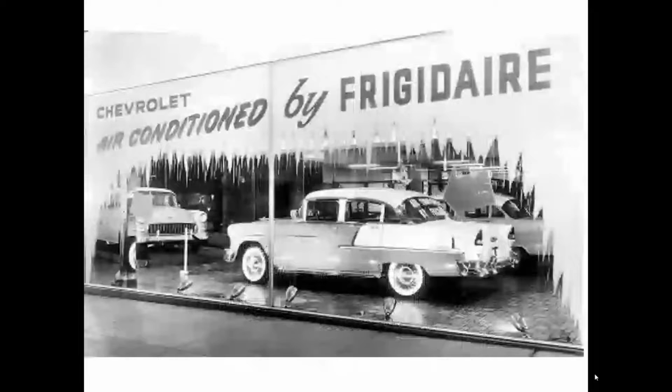In the beginning of automotive air conditioning systems, that would put us in the mid 50s. This is where average vehicles started to use air conditioning.

All vehicles used the same kind of refrigeration oil. It was called refrigeration oil, sometimes also called mineral oil. Same thing: mineral oil, refrigeration oil.

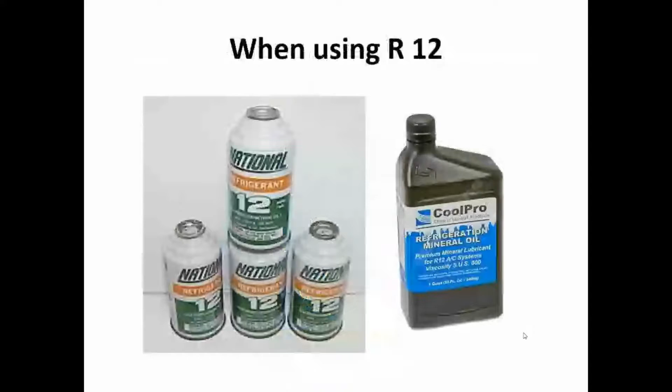When should you use this kind of oil? When you're using R12. When should you use R12? Probably never, it's not very cost effective. They cost about $50 a can, and you have to have a license to get it. It's not practical to use R12.

So what are you supposed to do on some of the classics? You're going to get a lesson on how to convert a little bit later in today's lesson.

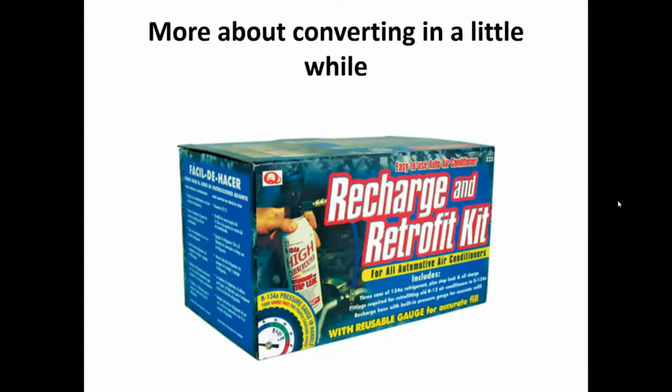For the longest time, all motor companies used the same kind of refrigeration oil. Remember, the refrigeration oil is very special, whether it's the past oil, the present oil, or even the future oil. It's not just regular oil like engine oil, it is highly refined with emphasis on very low moisture content.

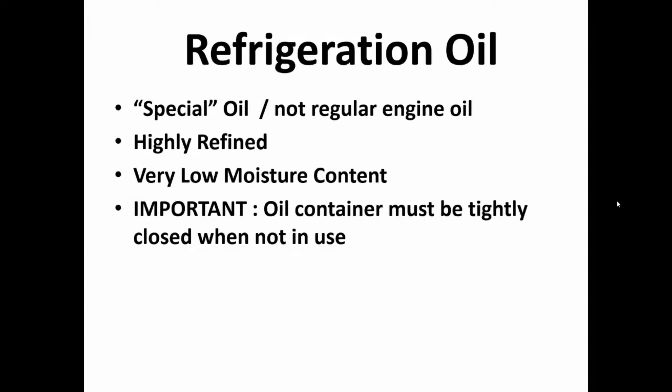Any refrigeration system cannot tolerate moisture. Between deteriorating the system and affecting the performance, refrigeration systems have to be moisture free. In fact, it's important that when you're working with the container of oil, the cap must be installed to prevent moisture from being absorbed into the oil.

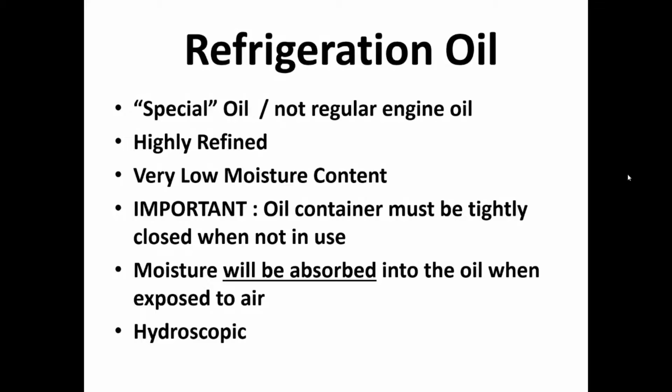Moisture will be absorbed into the oil when exposed to air. The technical term is called hygroscopic. I believe brake fluid is also hygroscopic. It's not good to have oil contaminated with moisture, so we actually go out of our way to keep the moisture out.

The moving parts of the compressor assembly must be lubricated for smooth operation and prevention of damage. It's obvious, just like an engine. But oil is also used at the seals and gaskets as part of the sealing process, and it's intentionally directed to the thermostatic expansion valve for correct operation.

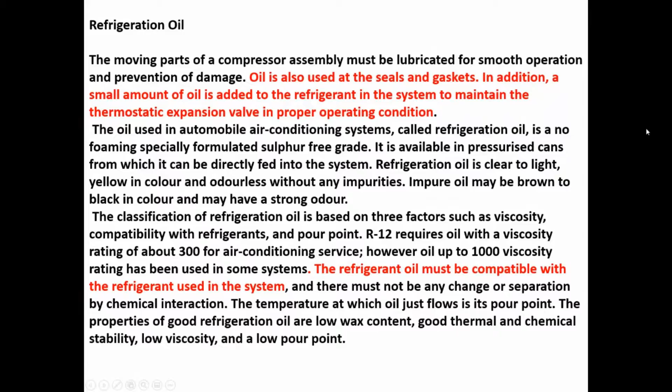The oil must be compatible with the vehicle and the system being used. Now we're in the 90s. Okay, I know that's a little bit old, but I'm headed somewhere with this.

There was one motor company that started to use a different kind of oil. Remember, this is the first time we changed refrigerants, in the early 90s. This is when R12 was on the way out and the present refrigerant was on the way in.

Google it, Google Ford Black Death, and you will find it. I didn't name it, I just share the information. You can read and see how bad it was. I don't need to read it, I was there, I saw it, I smelled it, hell, I tasted it.

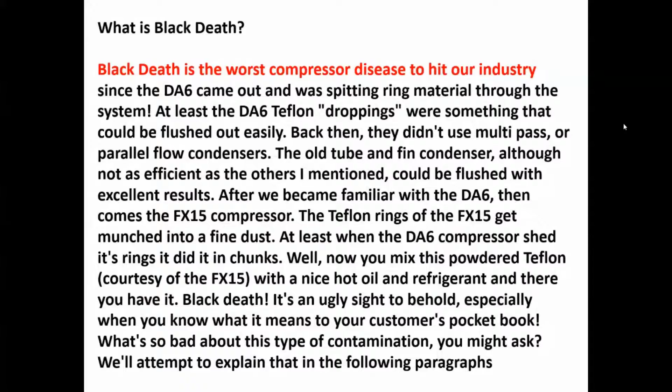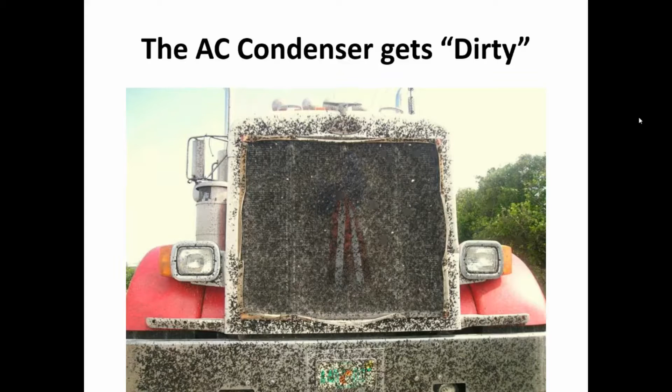It's the worst compressor disease to hit the industry. Here's what would happen: let's just say this is about a '92, and the vehicle starts off new. After a few years, obviously the vehicle gets a little older, and since nobody ever cleans their condenser, look at that mess. Since nobody ever cleans their condenser, the condensers are dirty.

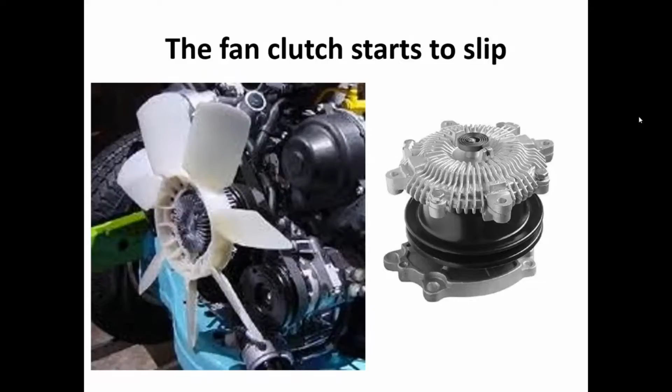And now we're starting to overheat the refrigerant. We're starting to overheat the compressor. I'm headed somewhere. These guys don't last forever. All the pickups, they had fan clutches. And after a few years and about 100,000 miles, these guys are going to slip. Some of the smaller vehicles on the Fords had the electric cooling fans, and it's very important that we keep the condenser as not hot as possible.

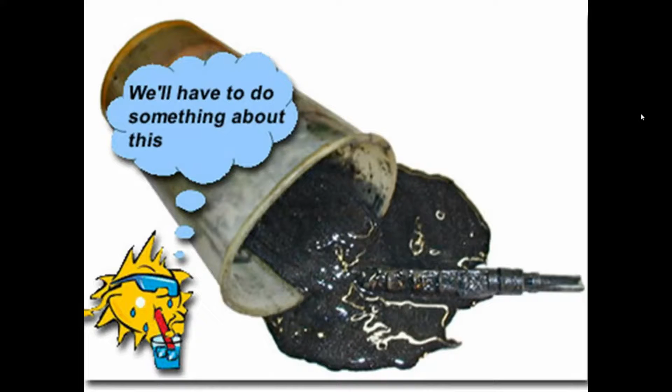You're in stop and go driving. You're in South Texas. It's hot as heck. Poor cars. Anyway, here's what would happen. The Black Death. It came from overheating. What caused it? What caused Black Death? In the red. It's the Teflon rings and the pistons.

You know, if I say compressor piston rings, you know exactly what I'm talking about. I'm talking about the piston rings. Apparently, the Teflon, the material they were using, was not meant for South Texas. They would get munched into a fine dust, and they would hit the hot oil because everything is so hot. The condenser is dirty, the clutch is slipping, extreme severe heat, stop and go driving. It's hot. The compressor would scream, it could cough.

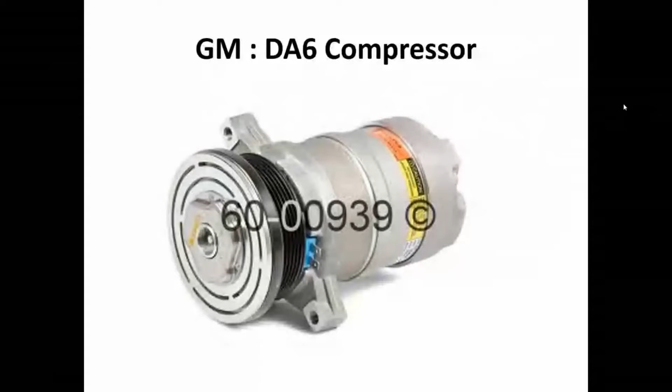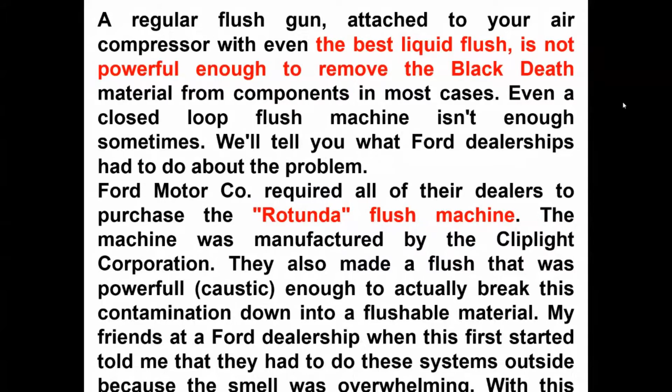Now, I'm not sure what it's like in Colorado. I've never fixed a car over there, but I know in extreme severe heat, these Mickey Mouse Teflon piston rings don't hold up very well in extreme conditions, and stop and go driving and dirty condensers and slipping fan clutches and inoperative cooling fans. You're destroying the piston rings. There's the FX15. And the best liquid flush was not powerful enough.

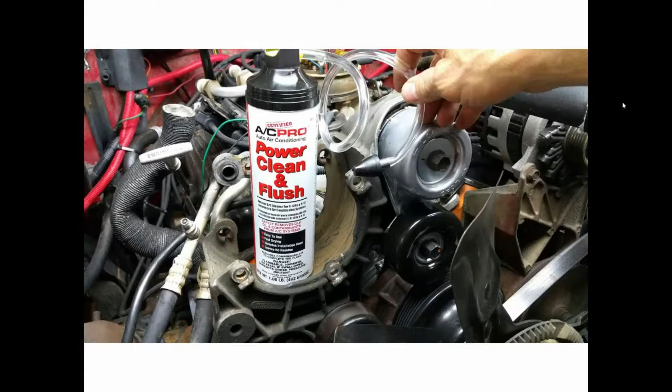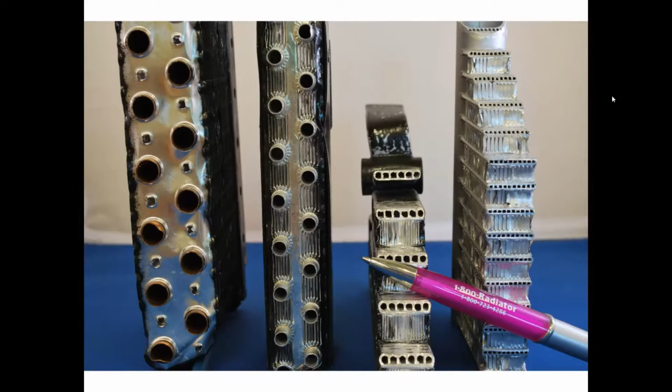On the left, that's a cutaway of a condenser. And that's what it used to look like. Look at the size of the passages back in the 90s and earlier. On the right, this is the design of a typical late model, meaning the latest thing out, new condenser. The passages are tiny, and you need to be asking yourself, well, why do they do that? They designed this condenser with multi-cross flow passages for extreme efficiency in the capacity. What the heck does that mean?

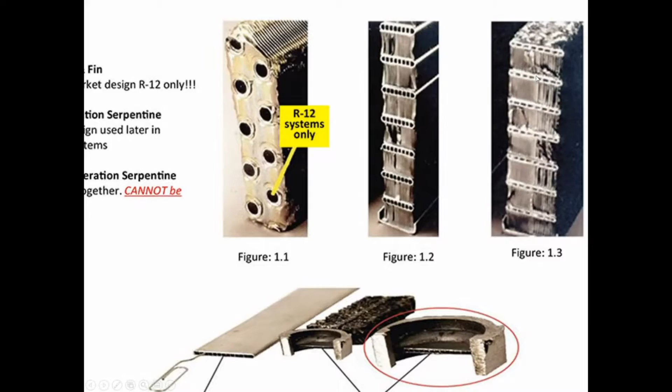In the early model on the left, we needed 4 cans of Freon to fill up that average pickup or average size car. On the right, a full size pickup, sometimes 2 cans is too much or 2 cans is plenty. We are now with high efficiency condensers. But what happens is we cannot flush them anymore. We used to flush, where's my picture of the flush? We still flush some of the components, but one of the components that we don't flush anymore is the condenser because of its design.

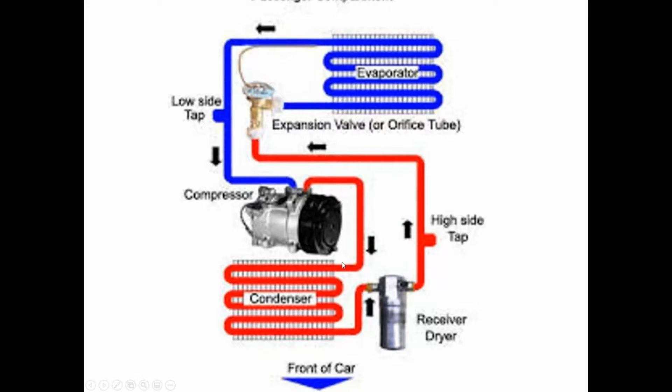They are justified in recommending or requiring that you replace the condenser if an AC compressor has had a catastrophic internal failure or even a mediocre failure. You just have to understand, at the compressor, at the red, the first place the guts of the compressor are headed is the condenser. The condenser is going to trap most of the deposits from the compressor. We used to flush them, but today you have to understand that we have to replace them. We're going to have to do something about this.

So how did we fix Black Death? Well, the answer was to add some extra oil. That's what the experts say. Let's put some extra oil in it. It seemed to work. Add extra oil above system capacity. Well, how much?

1 or 2 extra ounces above system capacity. This was my first introduction to extra oil. I like oil. In fact, I am very generous with the oil. I don't know if you've picked up on it, but there's three major reasons I like extra oil. There they are, refrigeration oil. Now we might as well get all the other reasons that I like extra oil.

I've done it by the book. I put in exactly what it called for. Yeah, I did everything correctly. I would flush, I would put a dryer, I would put the correct amount of oil, I would do my nitrogen evacuation. All of this is coming at you in the lab. I would do this at home, trying to make a little extra money on the weekends, and I don't like it when something went wrong.

In fact, I hated it when I had to do the job again for free. Well, why for free? Because I guarantee my work. I would do a compressor job, and within a month, that compressor's back. I absolutely hated it. After 1 or 2, what I call ridiculous numbers of system capacity. Let me show you in the red. This is an example of what I call a ridiculous number.

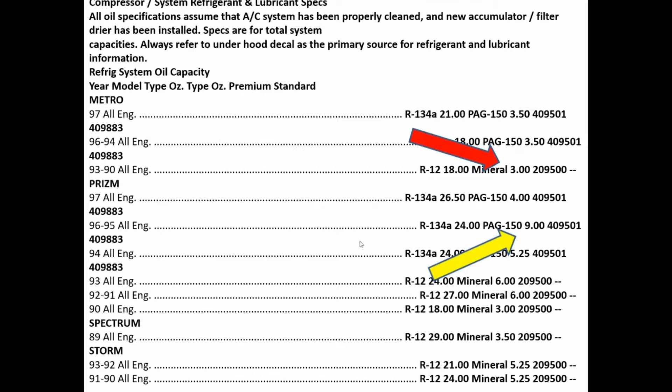Now, in the yellow, that's a more realistic number. Most of the vehicles used to take 6, 8 ounces. Some of the larger units would have to take some more. Some of the really small ones, maybe 6. But that red arrow pointing to 3 ounces, I think that's ridiculous. Screw the specs. I'm not working for free. I'm going to put some extra oil. It worked on Black Death. It's going to work on these ridiculous numbers. And it's pretty good on the regular amounts too.

The last reason I like extra oil, because it's very helpful for the UV dye. In fact, the UV dye is blank, worthless. The UV dye doesn't work by itself. It has to have the oil. The UV dye needs the oil.

Now, here's a quick lesson on converting. But first, let's get EPA out of the way. EPA wanted 3 things. Now, EPA is not interested in satisfying the customer. EPA is interested in saving the world. Not one speck of refrigerant should you vent. That means let it go into the atmosphere. I'm embarrassed to say I did it for decades, but that's all we knew. We didn't know any better.

Okay? You're going to install these fittings. I'm going to show you the fittings. Now, these fittings used to come with a sticker and a label. I'm not sure they do anymore, but let's go on. This is the main secret to the success.

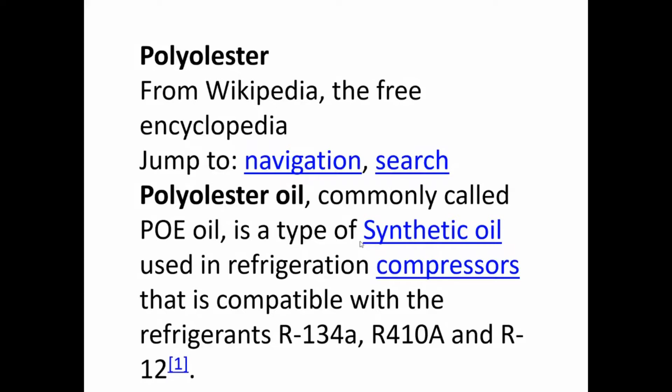Here you see the name Ester. Now, Ester, the real name is polyol ester. Polyol ester oil is a synthetic oil for refrigeration compressors, and it is compatible with a few different refrigerants. There it is, the nickname Ester. Ester is the secret to a successful conversion. It is the main thing that you have to do.

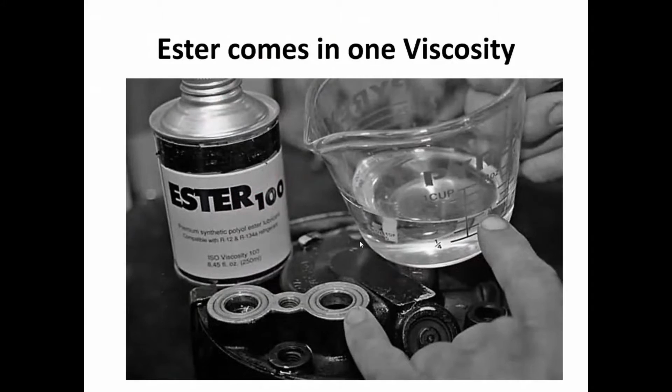When you're working on a late model vehicle, you're not going to use R12, you're going to use Ester. The real name is there. And Ester comes in one viscosity, 100. Ester refrigerant oil. That is the only conversion oil. If you're working on an early model classic vehicle, you're not going to put 12, you're going to put 134A, and the secret to your success is the Ester oil.

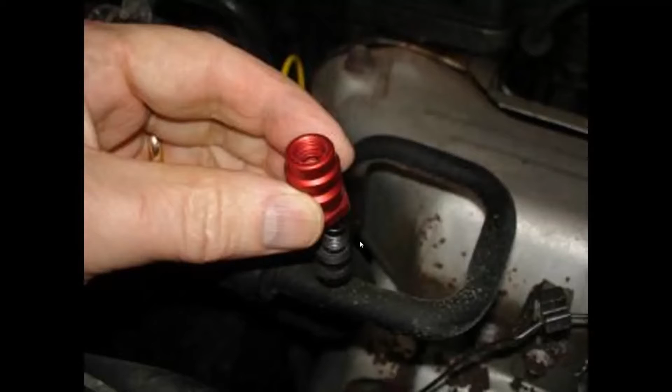These are the retro fittings that EPA requires you to install. Now, the reason is to tell everybody underneath the hood what kind of refrigerant you have.

Well, you might be thinking, wasn't there only one? You're going to find out. You were supposed to recover every speck of refrigerant. You're supposed to install these retro fittings. The retro fittings would fit on top of the existing R12.

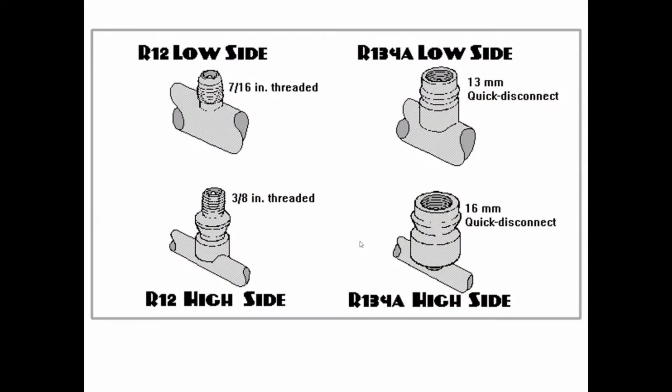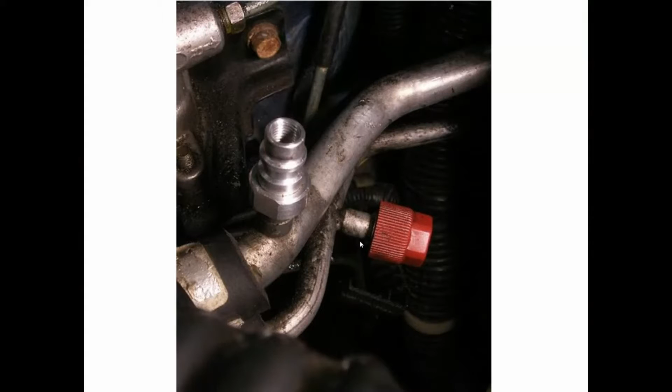On the left, those are the R12 fittings where we have the threaded ones. And you would put these adapters, retro fittings. It would do two things. It would allow you to use the 134 gauges, and it would tell the world, anybody else working underneath the hood, what kind of refrigerant you were using. Can you see them? Here's the retro fittings that would fit on top of them. Here's a couple more.

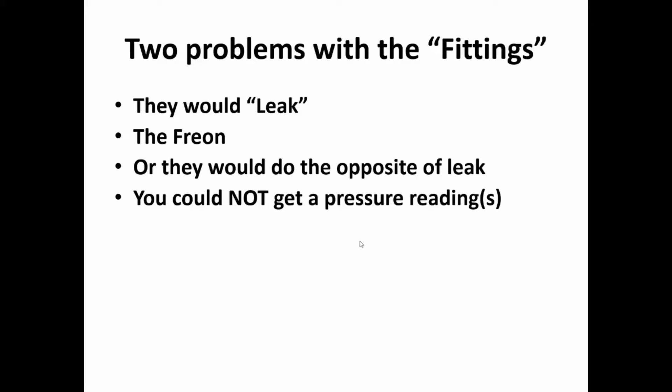Now, there were two problems with the fittings. They would leak refrigerant. The Freon would leak. Or the opposite of that, they wouldn't let you get a reading. They wouldn't actually let you connect to the system. The fittings were a hassle, but they were required to be legal.

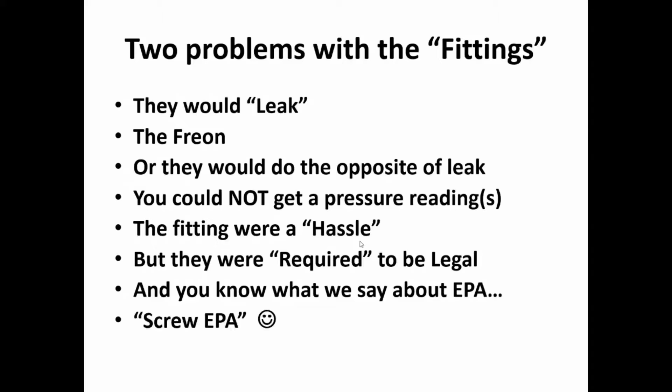And you know what we say about EPA. No, it's the other way around. EPA will screw you if they catch you breaking the law.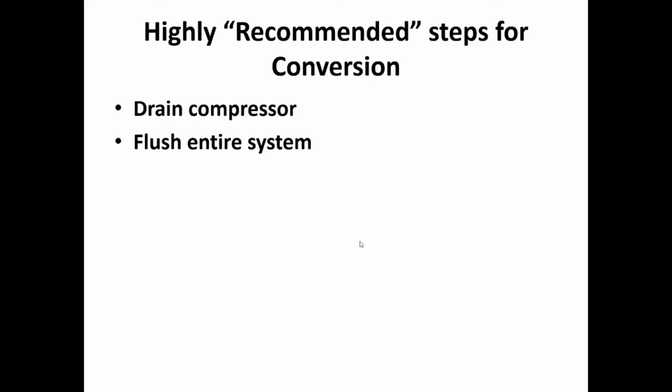Now, these are the highly recommended steps for the conversions. Highly, highly recommended. The oil that's in there is no good. In fact, it's in the way. So all the oil you get out is better. So you're going to drain the compressor. You're going to flush the system. In the lab, I will demonstrate how to flush the system. It is professional to replace the drying element.

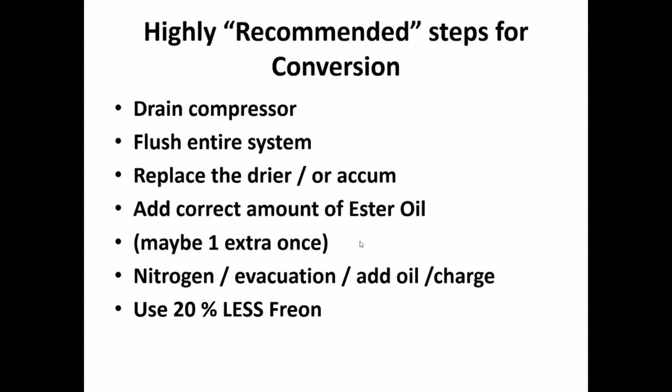You're going to add the correct amount of ester and maybe one more. We're going to pressure test, evacuate, we're going to charge it, and you have to use less refrigerant. Do not add the full amount of refrigerant. It's not going to work. These are the steps to convert an early model classic R12 system into a working 134 system.

Other information you should know about the conversion. It's not that cold. The new Freon, I remember customers, I want the new Freon. And I would tell them, no, you don't. It's not that cold. The 134, yes, it's more environmentally friendly, but it's not as cold. Some conversions would work pretty darn good, and some did not.

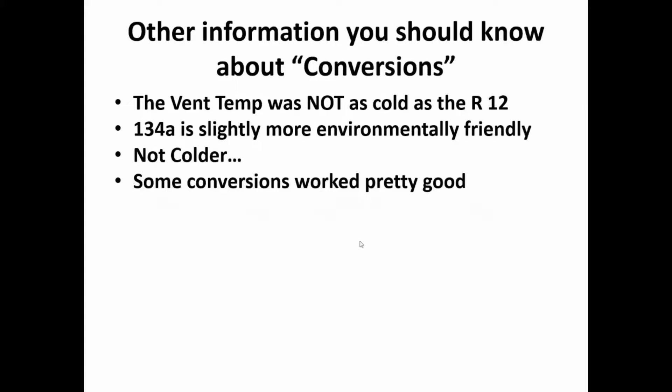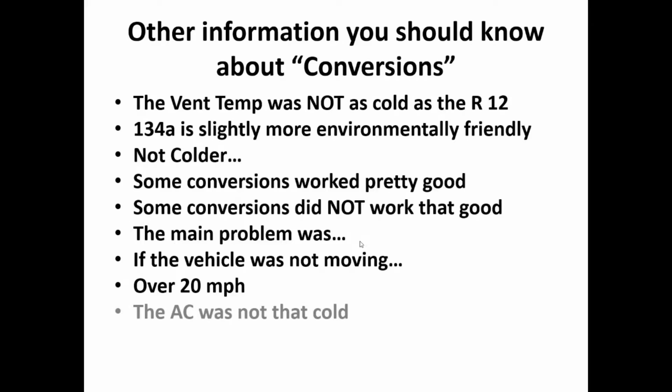The main problem was if the vehicle wasn't moving over 20 miles an hour, the AC was not too cold. And of course, maybe you can answer, there's no ram air, the air coming in through the grill, and less cooling of the condenser, the pressures were too high. And we would have to compensate by putting in 20% less. The condensers were too small.

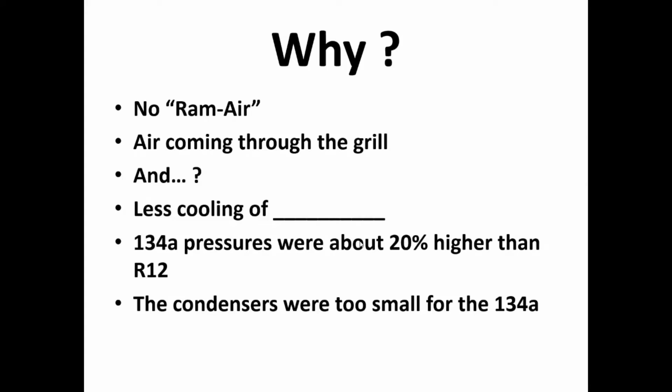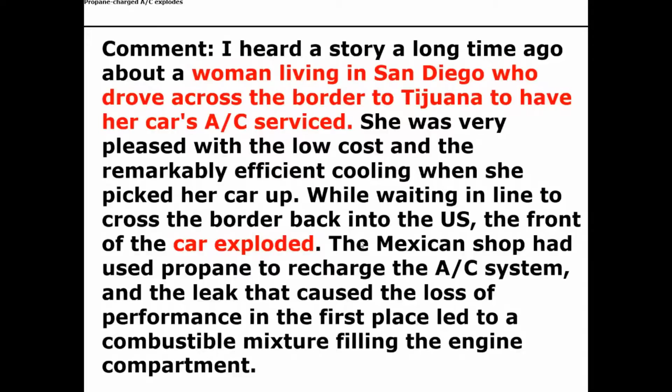And guess what else you don't have to worry about? Propane. Yes, propane butane can be used as a refrigerant. It's nothing new, and it works great, except, here's the story. A woman living in San Diego, and I don't make this up, drove across the border to Tijuana to have her AC serviced. She was very pleased until the car exploded. If it leaks refrigerant and there's any kind of spark, yes, they're explosive.

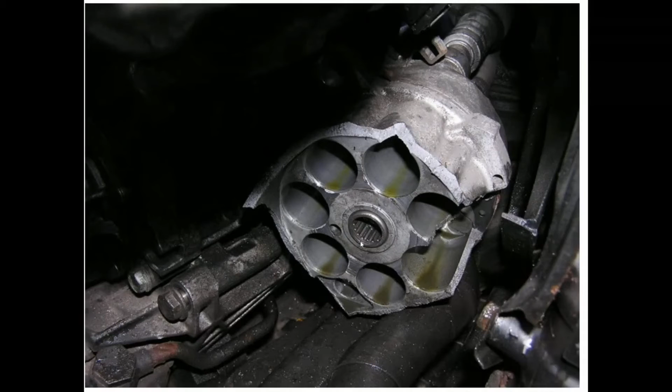You know propane butane is explosive, but did you know it can be used? Look, folks, it's happening again. We're changing refrigerants. The phase-out of the 134 has started. You need a license to buy a 30-pound cylinder. Here in a couple of years, you're going to need a license, and I'm going to have you set up.

Let's go on to the next oil, the one we use today: PAG. PAG, I suppose, is an acronym - polyalkylene glycol, used on R134 systems.

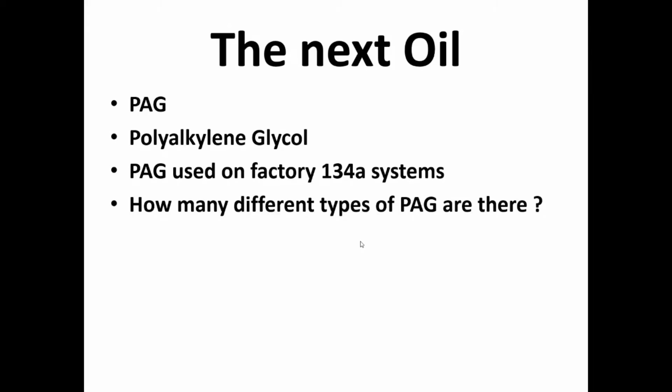How many kinds of PAG are there? I'm not sure, let's start with the basic four. PAG 46 is probably the most common in late model vehicles, but they also have PAG 100. For a little while, General Motors was using PAG 150, and they still have PAG 100 available.

You have to buy the right PAG and install the right PAG. It's kind of like steering fluid or transmission fluid - you have no business putting the wrong fluid into the vehicle. It needs to have the right oil.

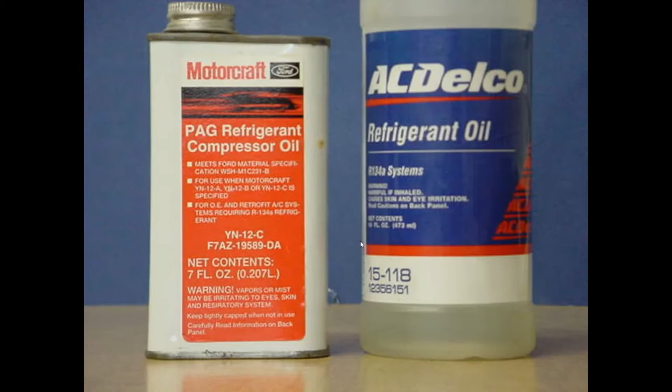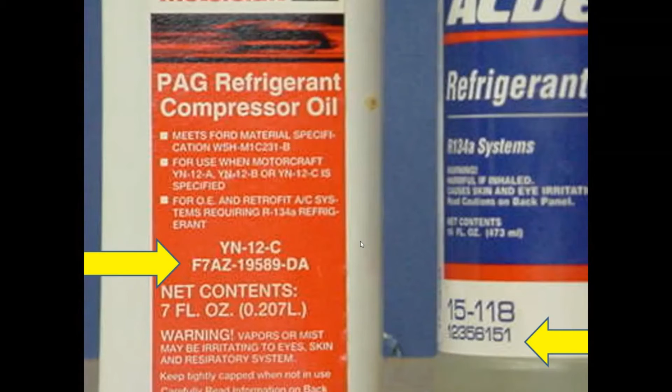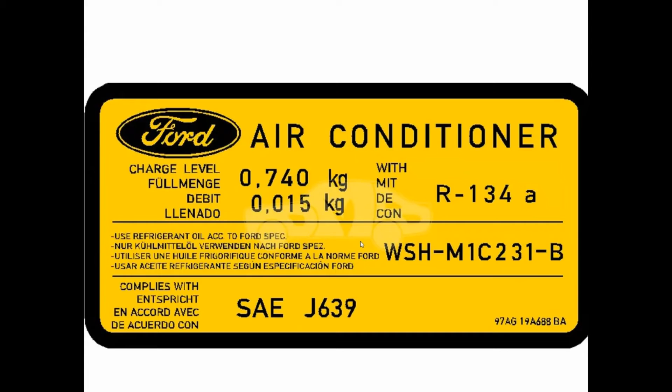Now here are some factory ones, and there's the pointer - that's the factory number for the PAG. You see the first pointer on the left, F7AZ-19589-DA, and then the one over here. The only reason I mention this is because the stickers under the hood are going to speak Greek. Right there in the middle: WSH-M1C231-B - that's the factory number.

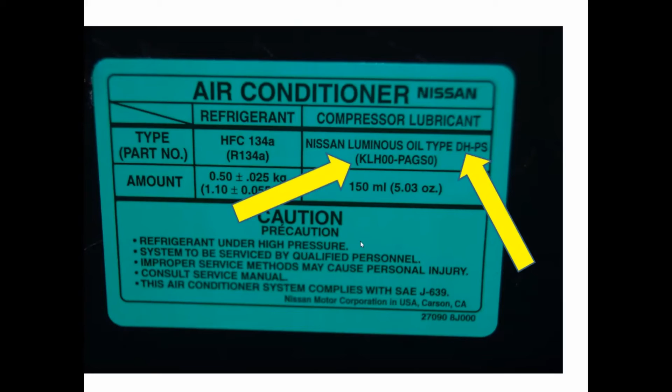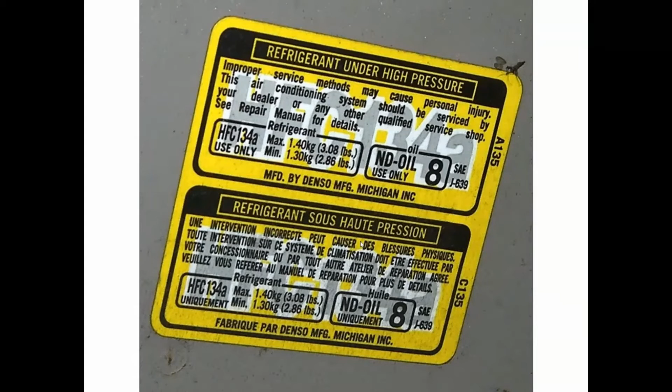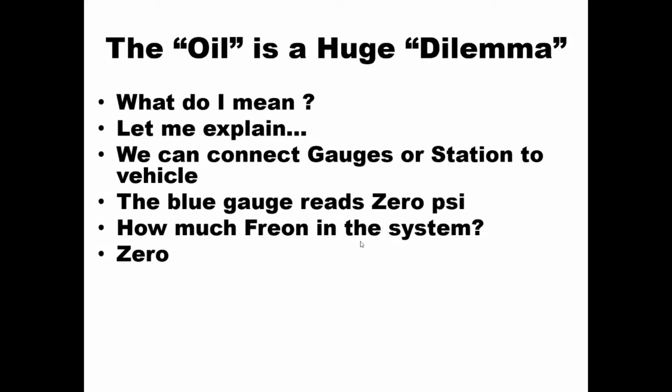Let's finish this lesson on oil. The oil is a huge dilemma - what do I mean by that? Let me explain: you can connect gauges or a station to the vehicle. The blue gauge reads 0 psi. Well, how much freon's in the system? That's easy - none. How much oil's in the system? The correct answer is we don't know. We don't know how much is in there. Just because the system is empty of refrigerant does not mean the system is empty of oil.

You have to do three things to say it's empty, and all three are a hassle. The first thing is to remove and drain the compressor - you're not going to want to do that sometimes. That's a lot of problem.

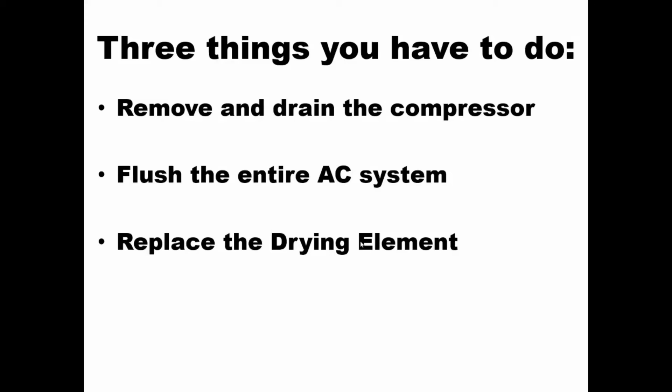You're going to have to flush the entire system - it has a coating of oil that needs to get out of there. The oil doesn't always come out during recovery, just a little bit. You're also going to have to replace the drying element. These are the three things you have to do to say, okay, the system is empty. Most of the time, you're not going to do these three things unless you're actually doing a compressor job.

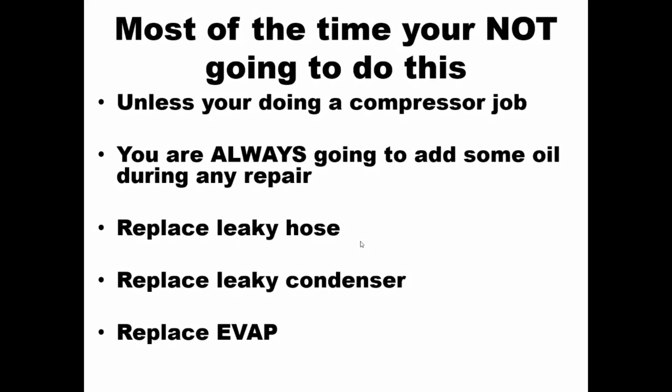You're always going to add some oil - always. You're doing an injustice if you don't add oil. If you're replacing a leaky hose, a leaky condenser, an evaporator, or any component of the air conditioning system, you're going to have to add oil.

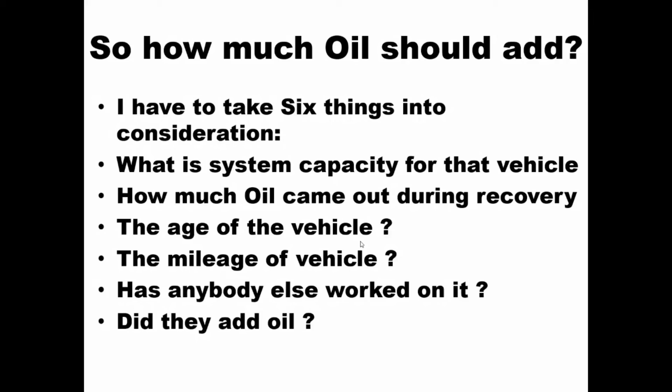So how much should you add? I literally take six things into consideration. First, what does it call for - each vehicle is different. Second, how much came out? Yes, you'll see in the lab during recovery there's an oil separator that shows you how much came out, but that is not the entire amount in the system. I have to consider the age of the vehicle, the mileage, whether anybody else worked on it, and did they add oil? Too many questions.

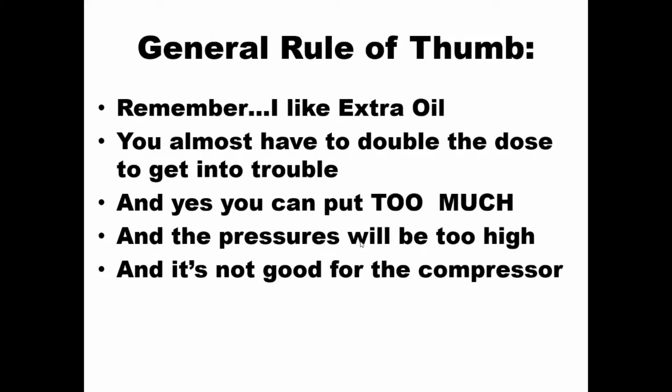So here it is - remember, I like extra oil. You almost have to double the dose to get into trouble. And yes, you can put too much, and the pressures will be too high, which isn't good for the compressor. So how much do you add?

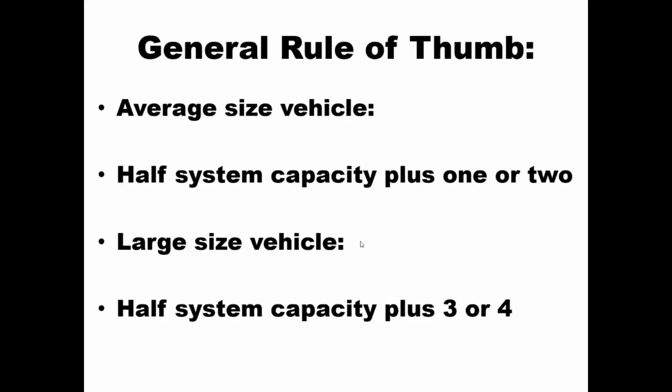On average size vehicles, add half of system capacity plus 1 or 2. On a larger vehicle - a full-size pickup, SUV, or full-size vehicle - you're still going to add half of system capacity, but be a little more generous with the oil. Hybrids take a special oil, and yes, I experienced adding oil to one of these, and I had to go out of my way to get the right oil. I'm done - it looks like we're at the end.